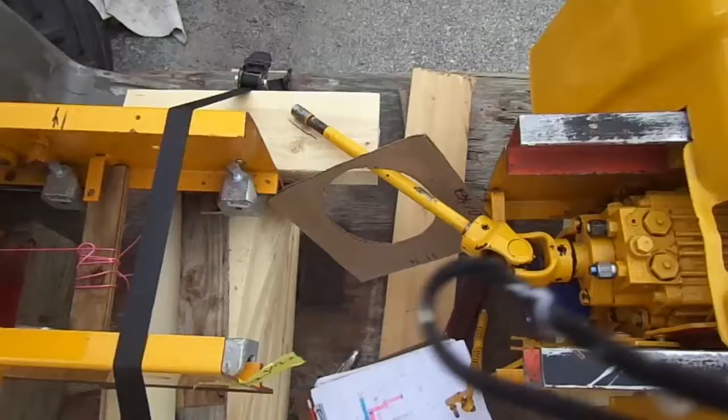Well, this is about how far it's going to turn. It's about at a 45 degrees. And I think it's plenty.

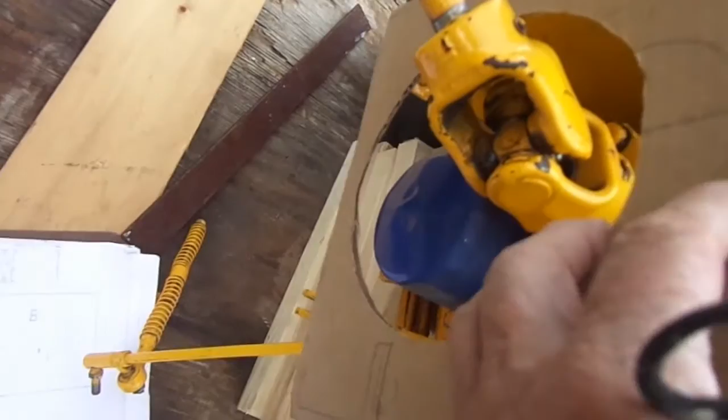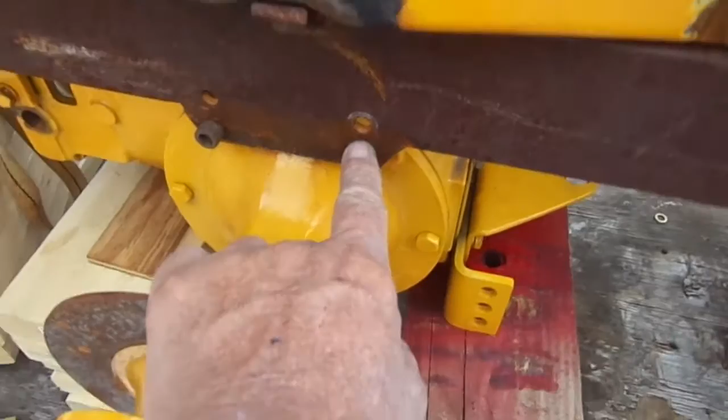What I'm going to do, I'm going to weld a piece of 3/8-inch plate just like this piece here, but it'll be in the bottom like this right here. It'd be in the center of that. But I got the reason why that's not center - that's a 1/2 inch on the bottom, because I dropped this rear end down a 1/2 inch. So now I got to drop this rear end down here, down a 1/2 inch here, and a 1/2 inch here. And that'll put that back right.

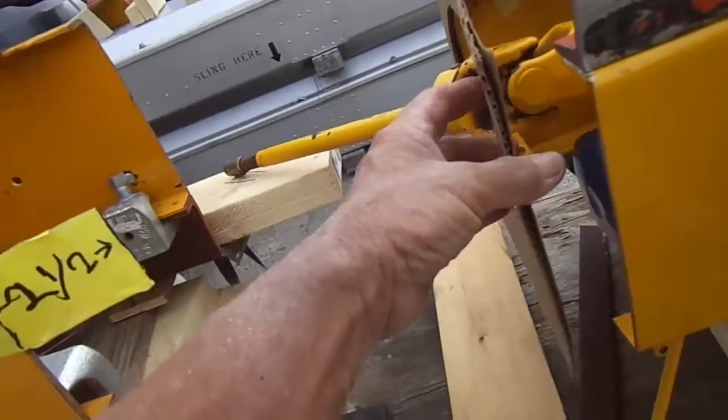But the only reason why I'm putting this 3/8 plate, for one reason, for weight. It'll add some weight to the tractor. Weight is what I want. I want some weight. So, and plus that'll strengthen this hole up right here.

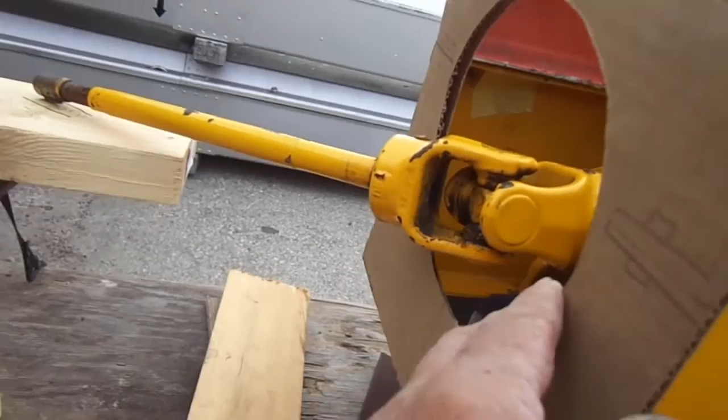And you notice that this hole I got in the middle, it's perfect for the turn of my universal joint. There'll be no problem whatsoever for the turn. Once it drops down, it'll be better where it's supposed to be, about right there.

You see it's about a 1/2 inch off at the top. And that's on this end here on the back where my B is. It'd be inside the frame there.

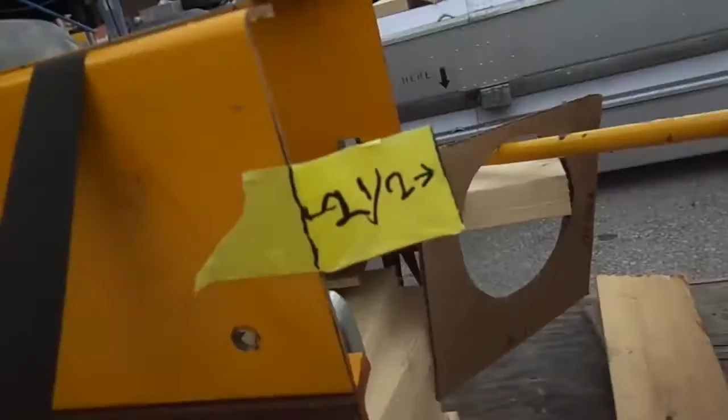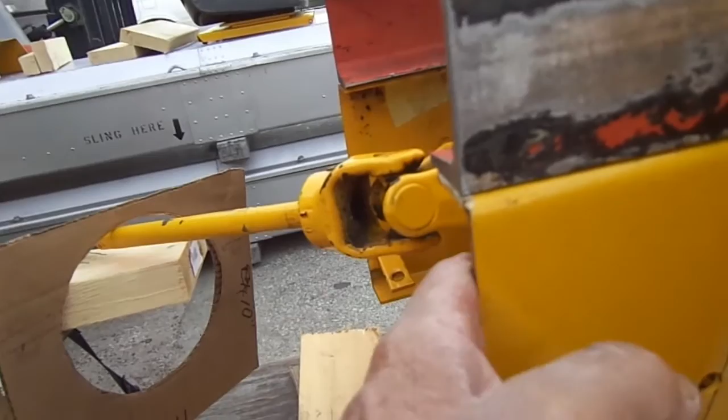I didn't see, I drew that in blue. I should have drawn this one here pink. I'm gonna put a 1/2 inch plate in this one the same way, but it'd be inside the 1/2 inch. This plate here be on the outside of this one, this 3/8. It could be on the inside. I don't know which one. Probably more or less on the inside.

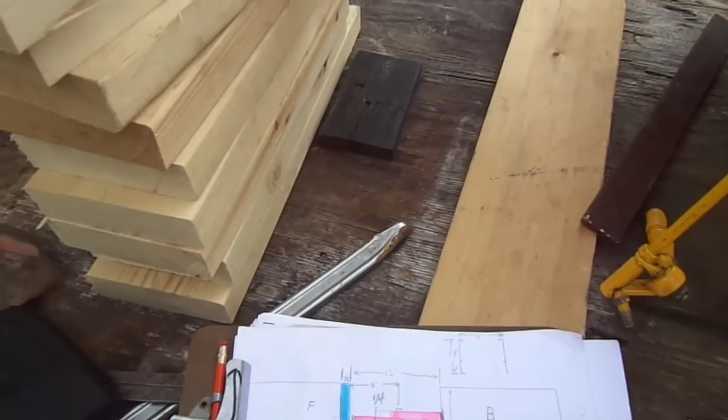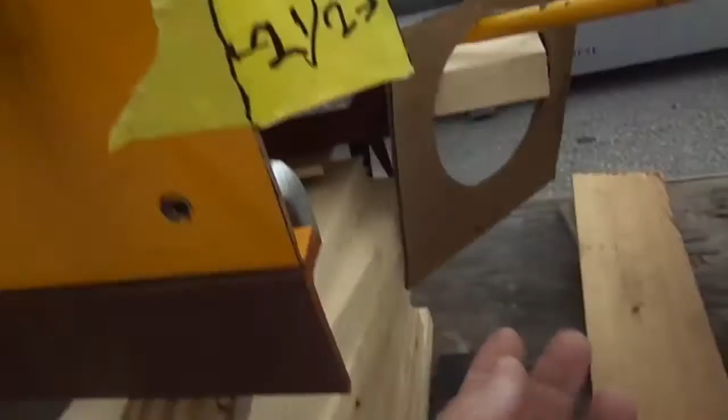It's trying to rain here, but you see from that blue mark right there, and to the end of that yellow, well, that's 2.5 inches. So that's where the end of my bearing be sticking out at 2.5 inches right there.

And inside here would be that 1/2 inch plate weld in here. That's for back of my flange, my bearing flange, whatever you want to call it. I don't know what the real name is, but it's a flange on back of my, and it kind of looks like, well, like that.

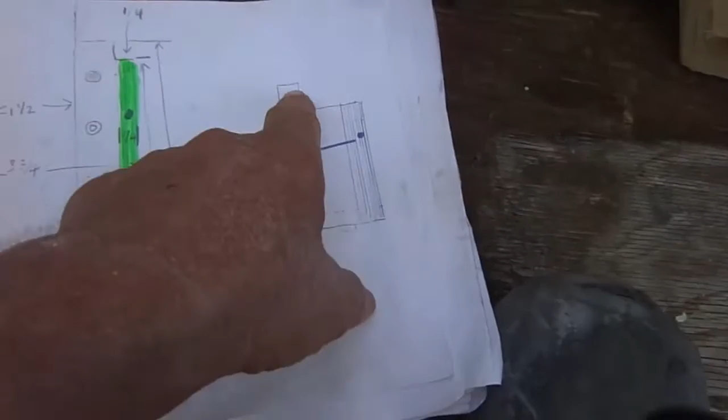You see this going out here with threads on it, this is turned down. That's what it's going to look like. Let's see what you see. Yeah, this is exactly the same drawing here. You see the yellow? That's the yellow there. It's the same drawing.

And that's the same one here. It's just a little littler. If you want to look at the measurements, freeze your computer and get the measurements, there you go.

But anyway, it's trying to rain. I'm going out and look out here by this trailer right here. So I think I got some 3/8 plates. I think I got a piece of 1/2 inch to fit in here.

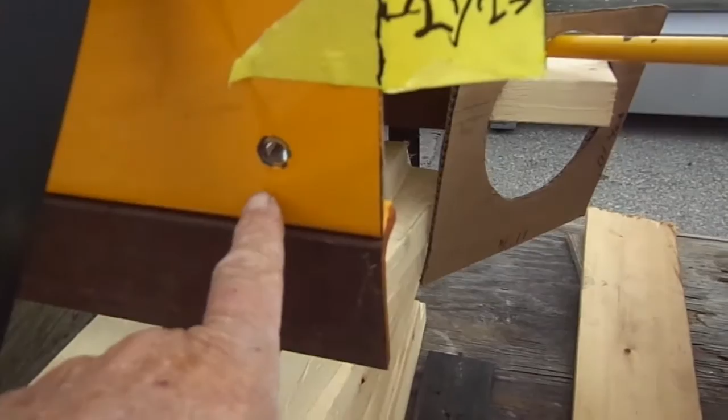But this 1/2 inch, it won't go all the way to the bottom. I don't think it's thick enough. I got to find out how big it is. I think it's 1/2 inch. It might be thicker than 1/2 inch. If it ain't, I'm going to have to find a piece of 1/2 inch.

This piece of plate here is either, I don't know what it is, either 3/8 or 1/2. But it's going to work for that other piece. Let's see what it is. Looks like it's 1/2 inch. That'll be fine, I'll use 1/2 inch.

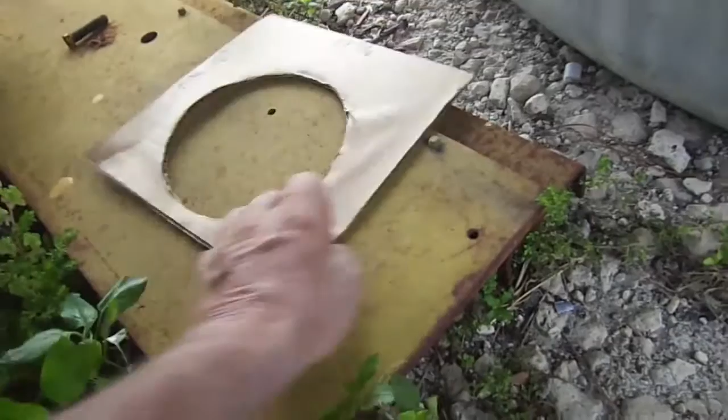Put this on there. Let's see, would it work? Would it work that way? Would it work this way? Yeah, there we go right there. That'll work right out. Cut a piece of that out. This 1/2 inch plate for this here. That'd be beautiful. And the other plate I got, this other plate here, I got a piece of plate here.

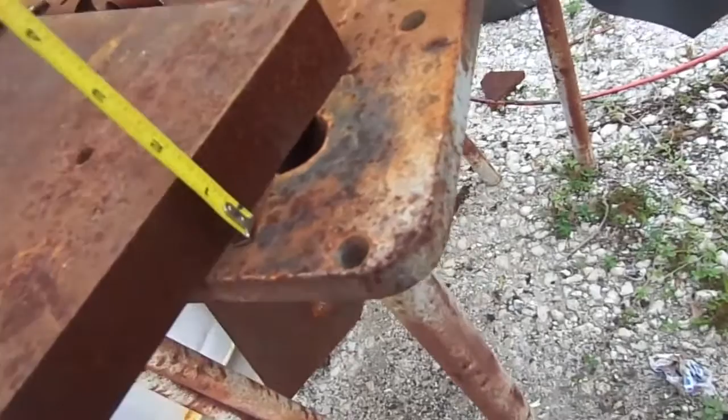It's 1.5 inches thick. But it's not going to work because it ain't wide enough. So I'm going to have to get something else sized for this.

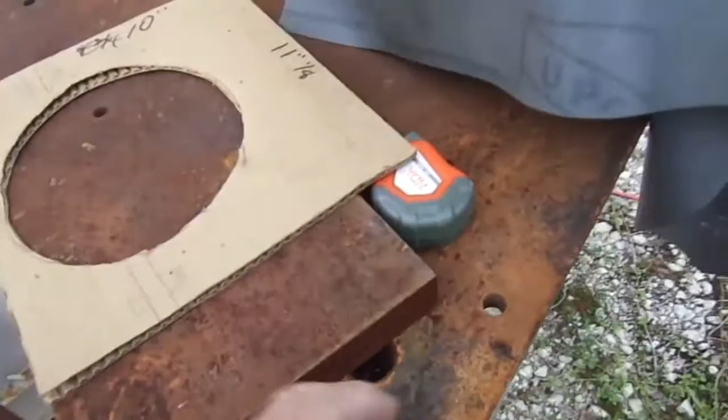I'm not going to use my table. I got a piece of metal there that's 1/2 inch, but I don't want to use it because this is doggone armor piercing metal here. This stuff, boy, it's hard to drill. You could drill through it with a cobalt bit, but it is hard to drill. It'll eat up some drill bits. I've already used some of them. It's just hard to drill through. Very, very hard to tap.

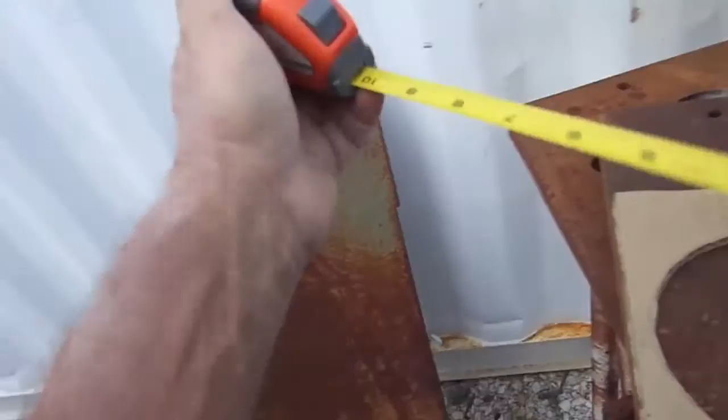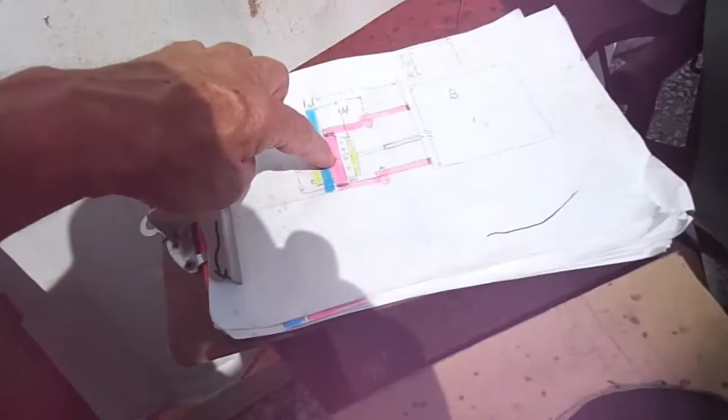Very hard. See, I believe that'll work because if I line it up right there to there, that's going up past my bearing, so that's good. The same way here, this piece here will be this pink piece in the middle right here. So on the top is where my other, down here the scale is a little different. Something different, I don't know what it is.

But anyway, I believe this is big enough here, this piece here to make that. Pretty sure it is. I'm cutting that at 10 and 9/16. That'd be just right. Well, it just fell off. This is like 1.5 inches thick. What is this? Yes, 1.5 inches.

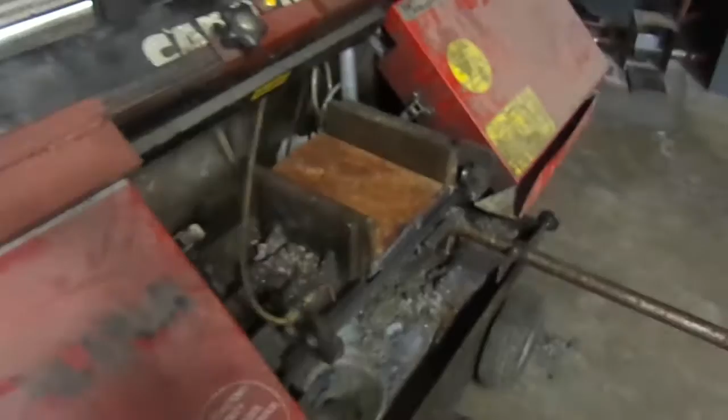I don't need this piece here. I need this piece up here is what I need. Now I need a piece of 1/2 inch, 10 by something. Well, I don't need it. I just go out there and cut it. I got it, I just got to cut it. Get it off the thing out there.

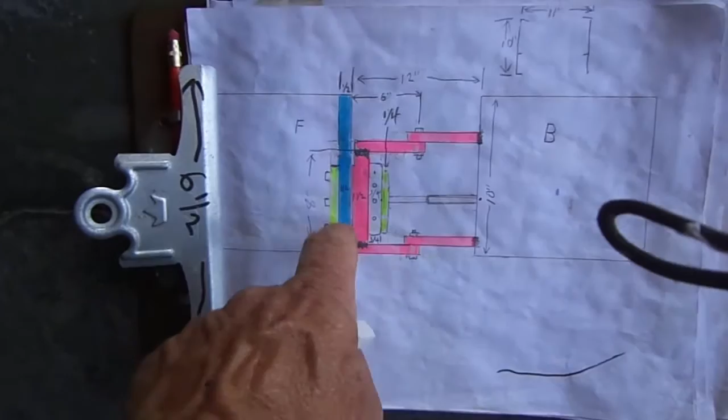This piece here would be my 10.5, which would be this piece going inside of here. It'd be buried in this. I think this is gonna be buried too. Yeah, this will be buried. And this will be buried in the frame.

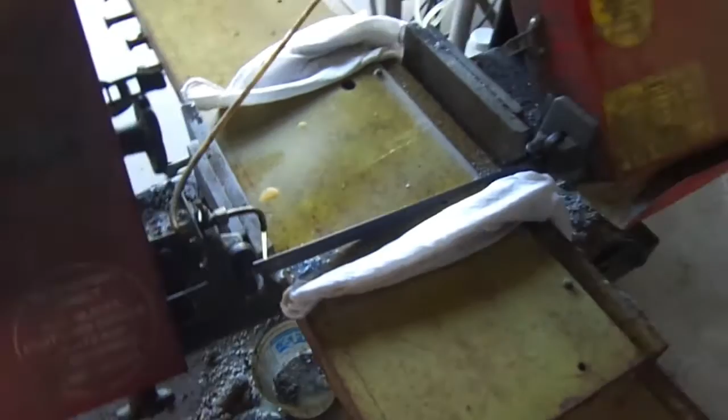So it'll be 10.5 wide, what I needed. So we're gonna cut this off. I'm gonna torch this, then straighten it up with a bandsaw, 10.5 inches wide. Well, here's my 10.25, I'm cutting now. This is for the back end of the frame. Will have the big 6.5 inch hole in it right here.

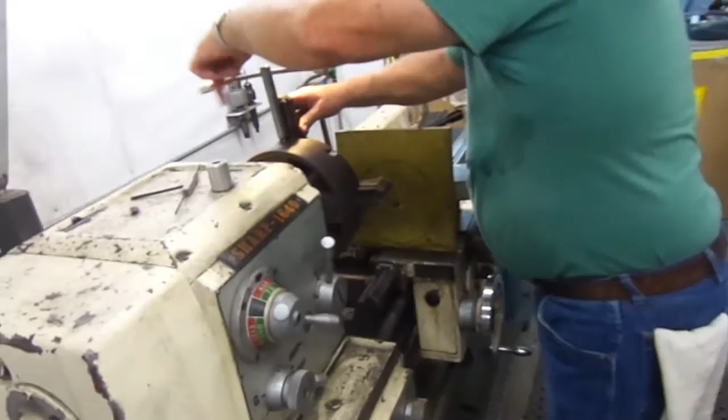You can see my drawing on the back. He ain't going by that, he's going by his own drawing. So he said to hell with that, he's gonna go the professional way. He don't go by magic marker marks, he's going the tool maker's way. Excuse me.

You got top written over here. I know this is a mistake, that's the reason why. Okay, so am I going right? Yes, that direction you are, this is the wrong. That's why I say, I did correct that. But you are right. Anyway, he's going to cut all these out for me and get my bearing up where I can get this thing running.

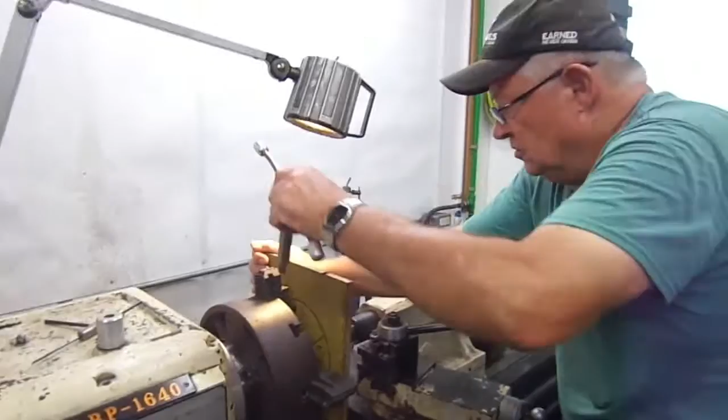These, grinding these off, all these plates. He's got to cut a 6.25 hole in the middle right here for this to fit in. I know that's 6 inches, but that's going to fit in there with a 1/8 bushing in there. It fit in there. That hole over there he's doing has got, I think it's going to be a 7 inch or 6, this is going to be a 6 inch hole.

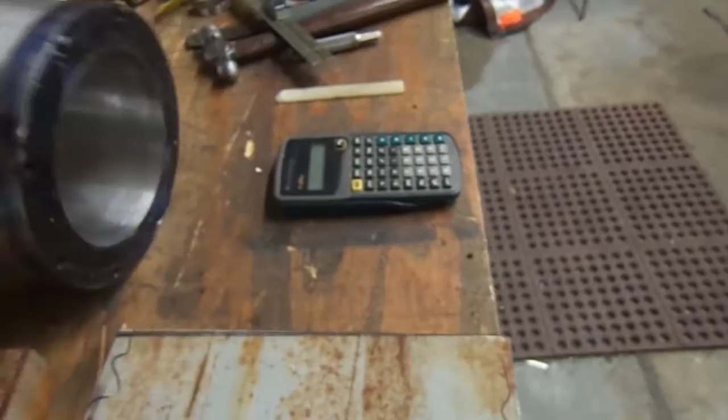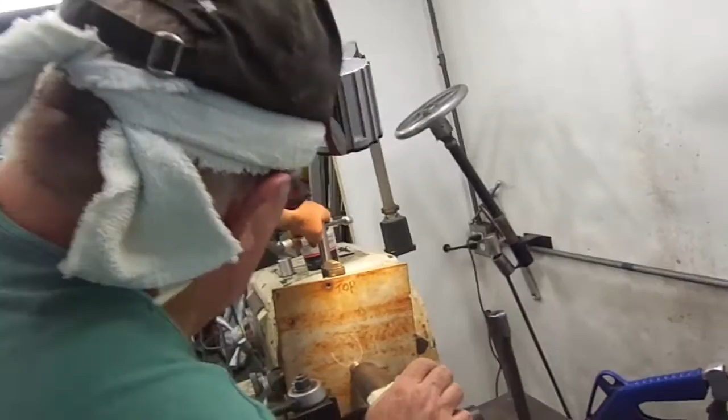This is going to fit through it. When it goes through it, them holes will bolt right into it. The flange will bolt right into this. So we got that, I got just to cut out another one somewhere else, right down there to cut it out. Send it up in the lathe where you can cut that hole with this 4-jaw nightmare, 4-jaw chuck. That's what I call them, a nightmare chuck.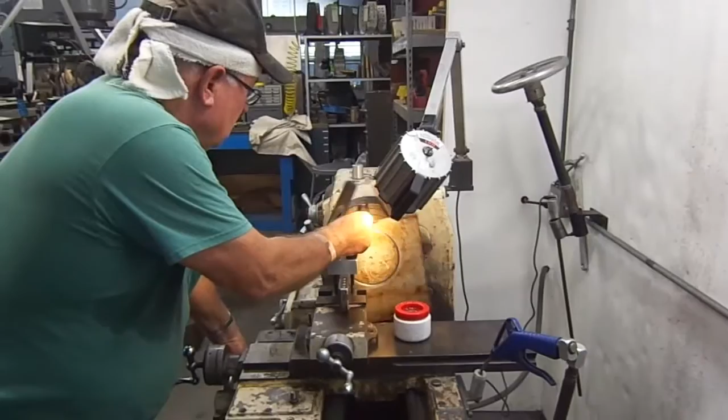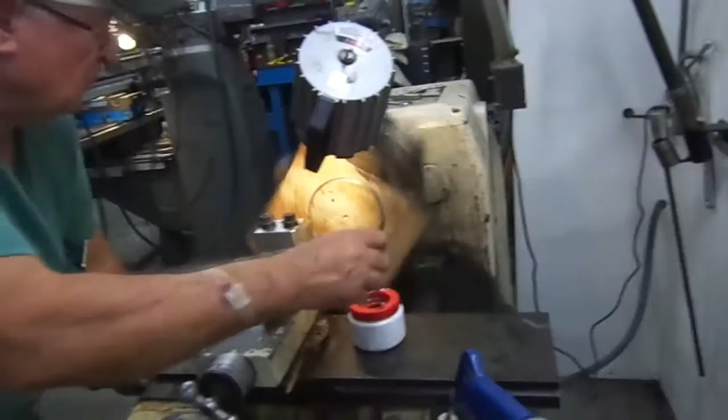It's called trepanning.

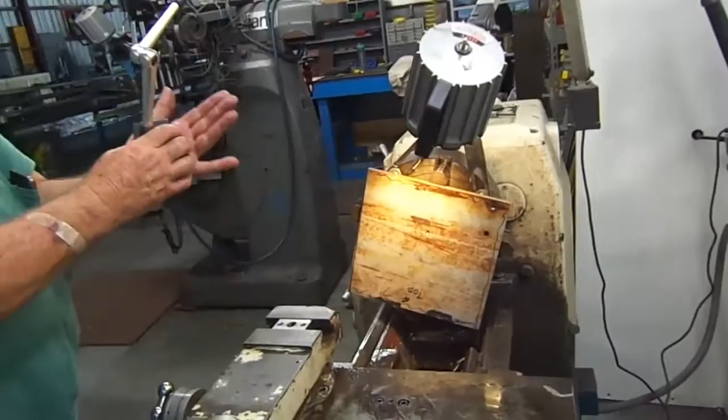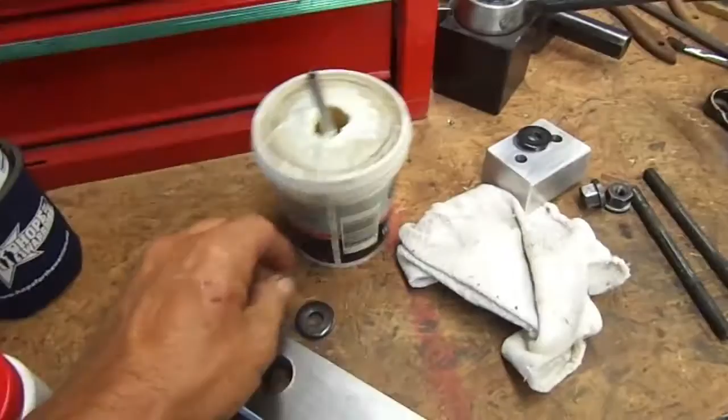Well, he's getting ready to do his second one now. He's got it all lined up and ready to put his homemade tool post in there. He made this, he made this to go on top of it to hold it. Pretty fancy little deal there. So he can slide that thing up, because if you go too far, this part here runs into the item. So he had to make that piece where it would go out further and get that out of there.

And this is the one he already did over here. Where'd it go? What'd I do with it? Oh, I took it over here. It's a little dark here right now, but that's it right there. It's ready to go.

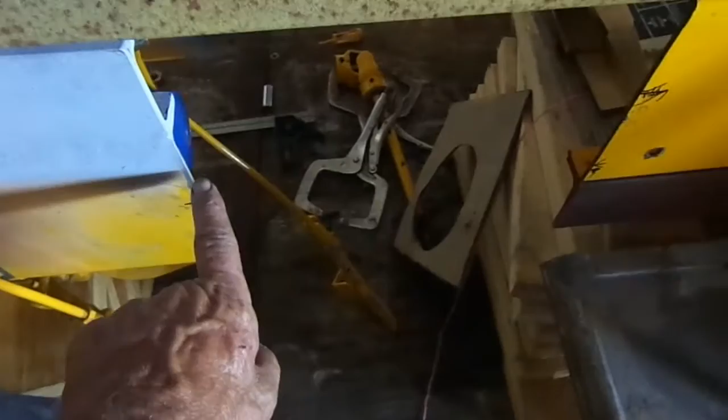So we have, this is a 6 inch piece, to be welded here. I have another one with a 7-inch hole to be welded here. Then I have the rest of my bearing on this side, and my other pieces going here.

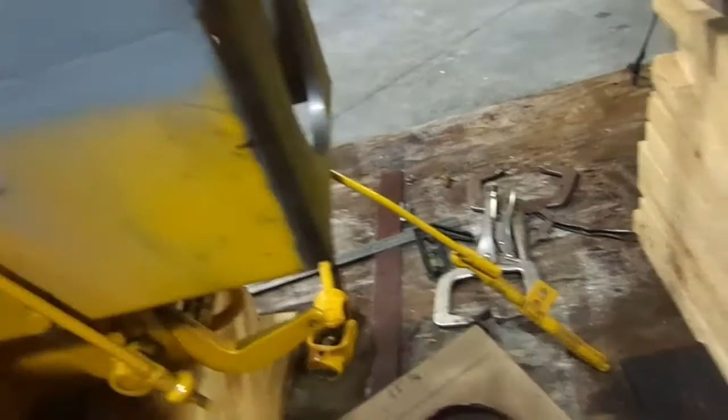So this is a 5/16 plate. This is, let me think, 1/2 inch plate here. So what I got to do is cut this back 1/2 inch, cut that out 1/2 inch back, and do the same thing behind there and behind there. Because this won't go up in there, it's got to fit inside the frame. So it'll be welded on the outside and ground smooth, then I weld it on the inside.

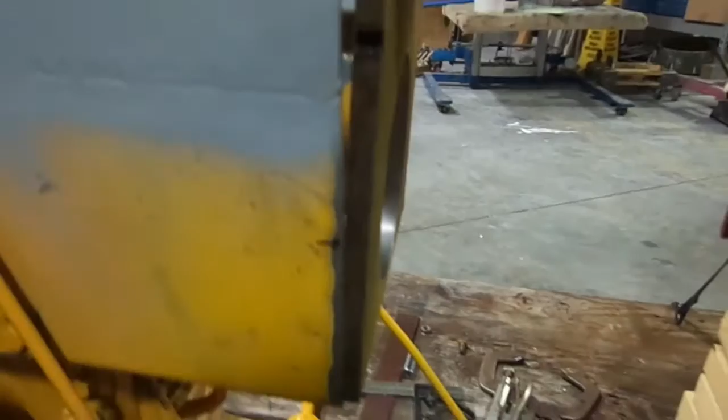And won't have no bolts here at all. Won't be no bolts, won't be no bolts. These holes will be covered up. That'll be taken out, covered up. I'll knock these bushings out, cover them holes up. Because I can't use these, they're too close for a hydrostat pedal up here. So I might have to move it back a little bit somewhere to make a hydrostat pedal. Can't make it right there, it's just too doggone close.

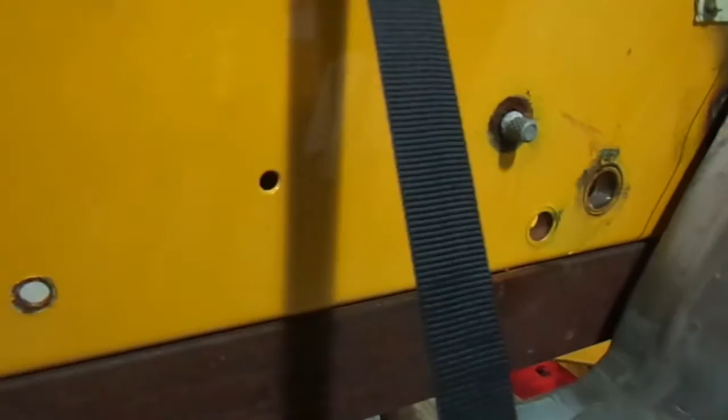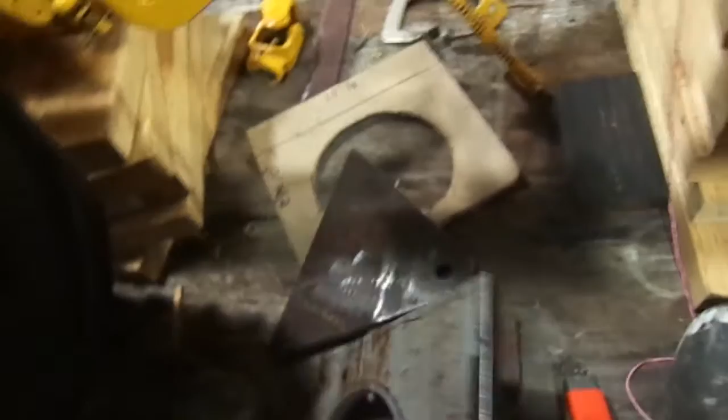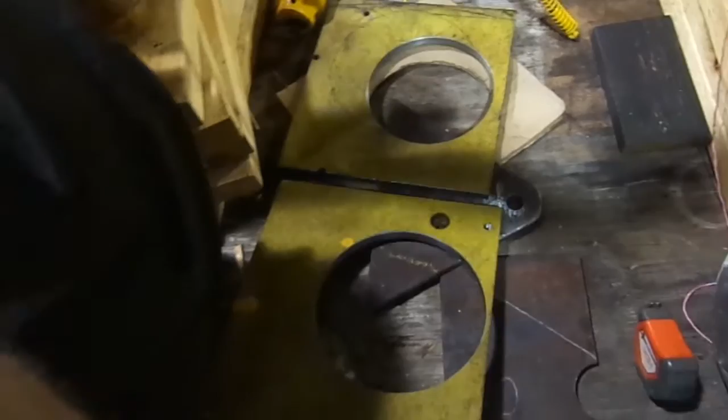But this one, this is the 6 inch. I don't know why I put it here. This 7-inch hole right here goes in that one, you can see it's much bigger. I don't know, yeah, you can tell it. That's 6 inch, this is 7 inch. So I got to swap them over, put this one on this side, then use this one over here.

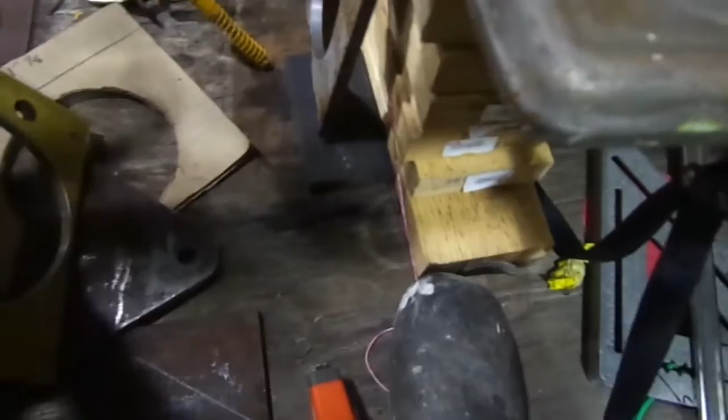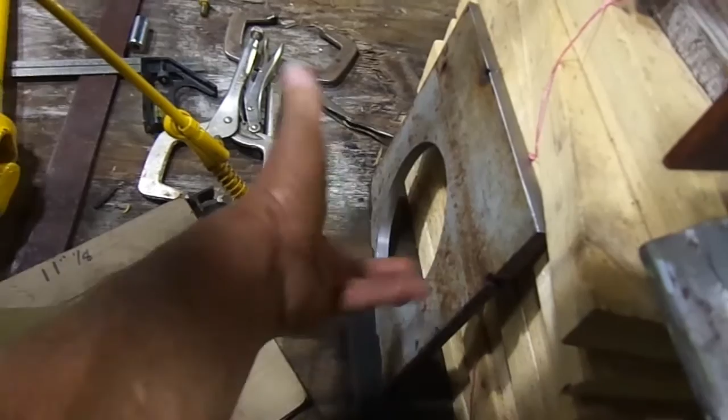This one will be my flange bearing come through here with that 1 3/4, I think it's 1 3/4 piece, be on here, then a nut be on it. Then I have 2 of these plates welded here, one down there welded off of it. Something like that.

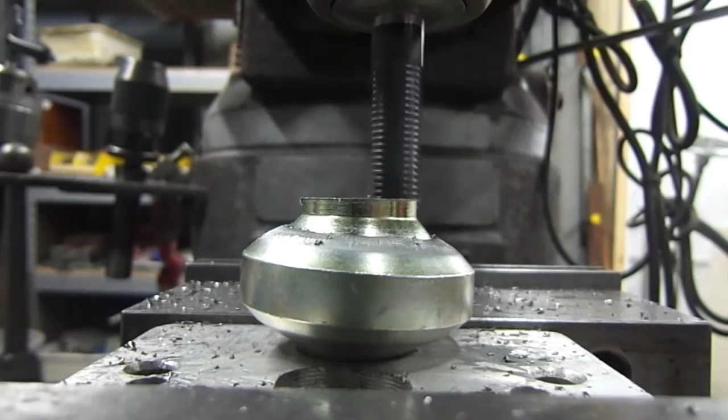Tend to do that till we get to that line, top of my finger, my nail. We get it down to that. That's what I want, I don't need all that height. I need a little more clear.

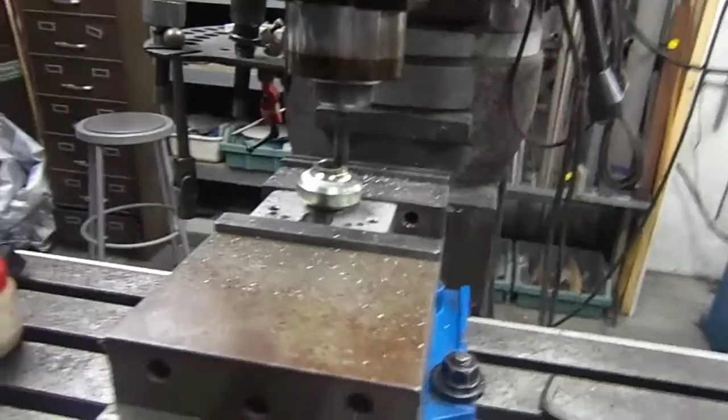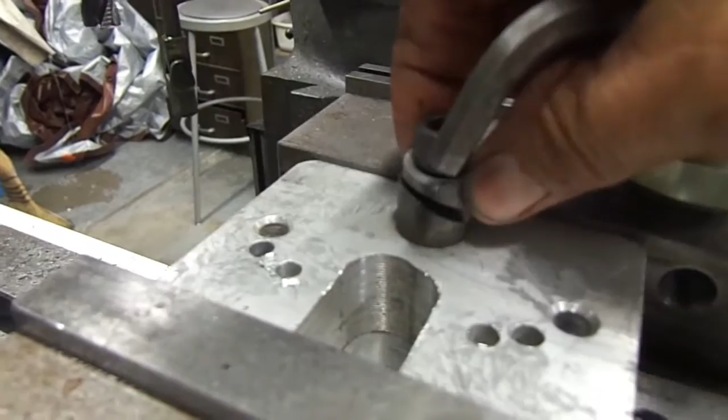I know you were wondering how I was holding it. I have a bolt in the middle. I made a little wedge clamp, just like they did in the bicycle handlebar. When you put the handlebars on, you tighten that top Allen screw up, and it stops your steering wheel from moving. Well, it's the same way I did this. Just unloose it, pull it off. You see them 2 pieces wedged together? So when it tightens up, they both expand, and they hold this thing for me.

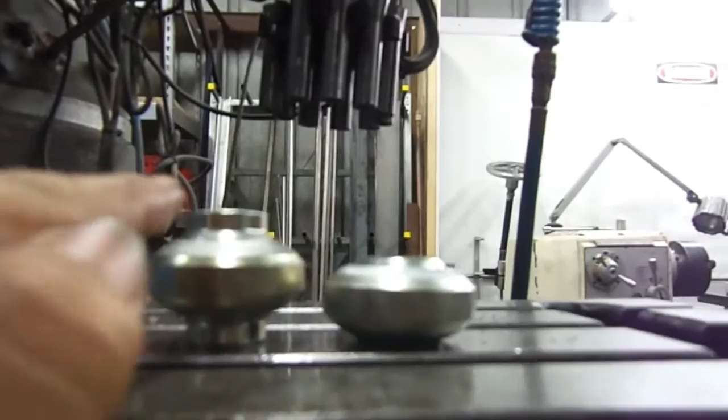So that's how we're doing that. I got one more to go with that one. All right, see how much different, tall this is? Lower than it is? That's what I want. Want it a little lower.

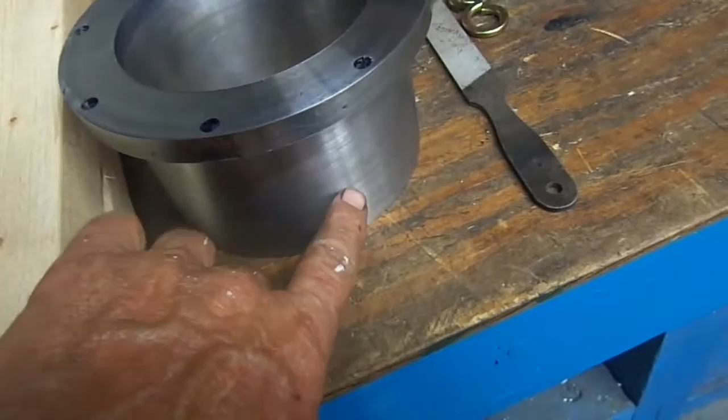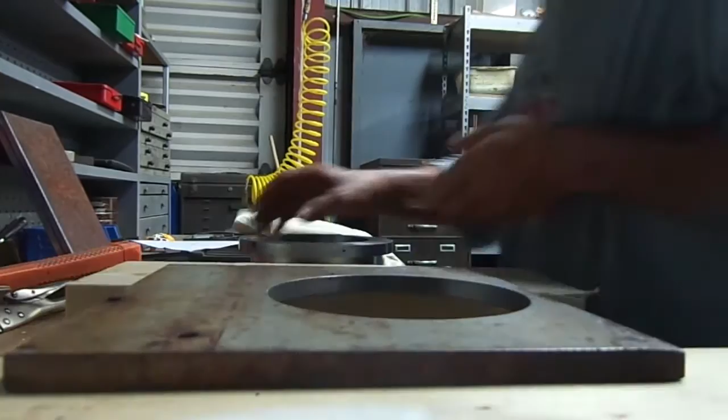There we go. Now I got to get this thing lined up pretty well and drill all these holes through here and tap these holes through here so I can put Allen heads. I'm going to put the Allen heads down in here a little bit so they won't be above it, they'll be down in it. So that's my plan.

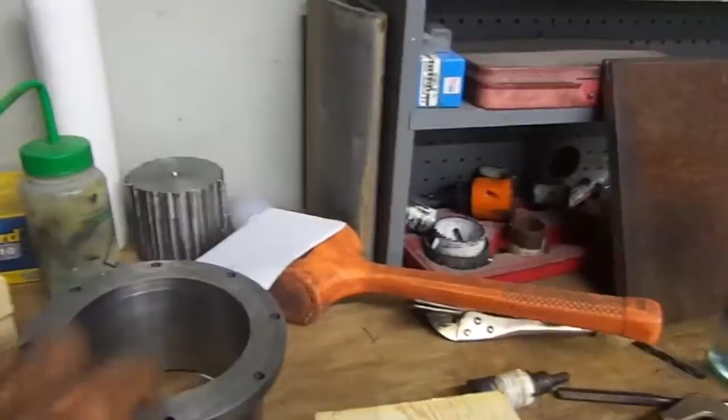Alrighty then. I took and laid that piece of this thing down in this hole, and I center punched every one of the spots where I got to tap, so I'm drilling and tapping all the holes now.

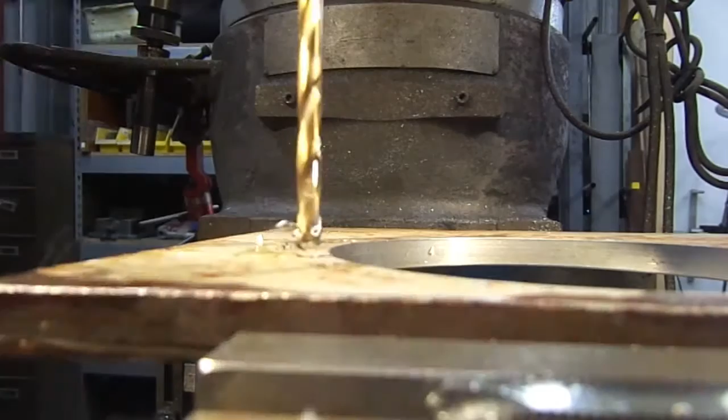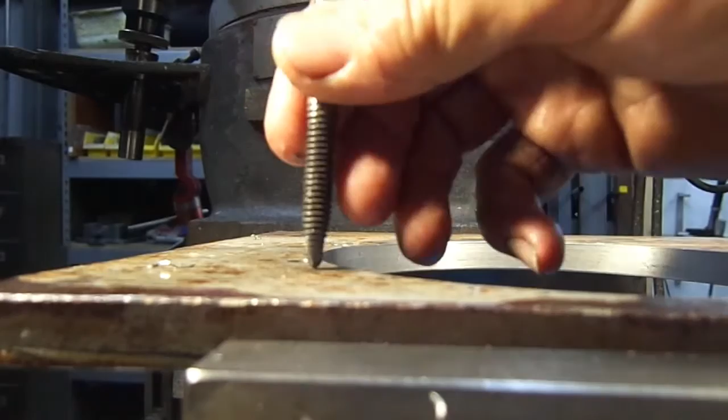You just got to make sure when you're coming down with this that right here you got enough distance in there. Don't let it bottom out, it'll break your tap off, because it can't keep going if it bottoms out. So make sure you have plenty of travel play. So just grease that booger up, start your engine, pick it up some.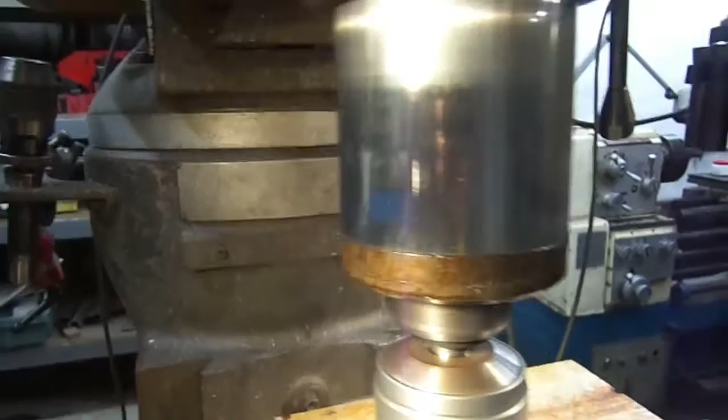Whoop, got to put it in low, can't get it high. Put this thing in low. Make sure it's in low, yep. Now you got to turn this the opposite way, this handle up here. Nope, wrong way, the opposite way. I was doing the opposite of the opposite. Just let it go. Watch it. Watch for your tap to come through here.

Drill back up. I got a little confused then with the camera. Almost didn't find my lever in time. Almost screwed up. So that's it, that's tapped through.

I'm about to put the camera down and do this because I don't want to. I almost bottomed out there, and I almost bottomed out there. I couldn't figure the lever, which lever, I got confused there. So I'm going to put the camera down and finish these. I ain't got but 2 done, so I got the rest of them to do. Well, this is the last hole. Got them all tapped but one.

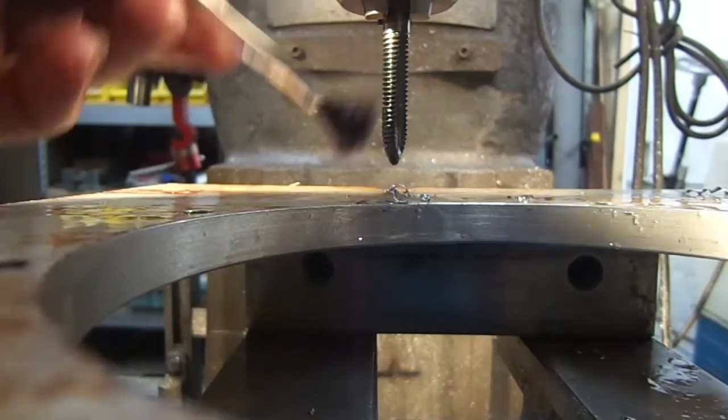There she goes, the last one. Last cotton picking one, we're through with that. I'm glad, I am glad, and we're done. We'll take it over and set the bolts, line up my piece over there.

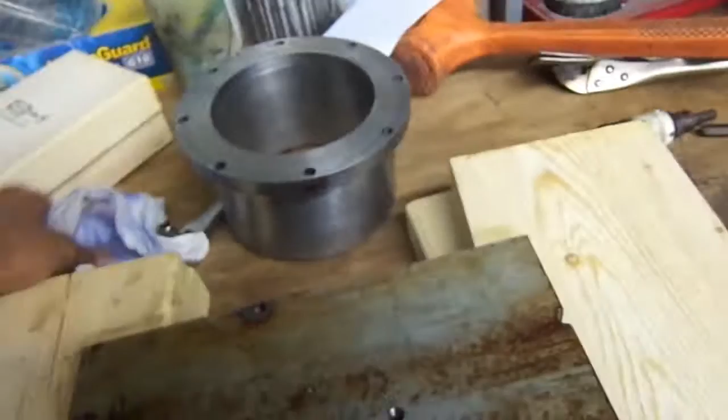Well, this is where the rubber meets the road, you might say. See if it's even gonna fit. I did mark top, didn't I? Yeah. Let me see if I got the right side. Yeah, I got the right side. So we gotta line that up with the mark at top. That's it there. Get a few bolts over here and see if they're gonna start.

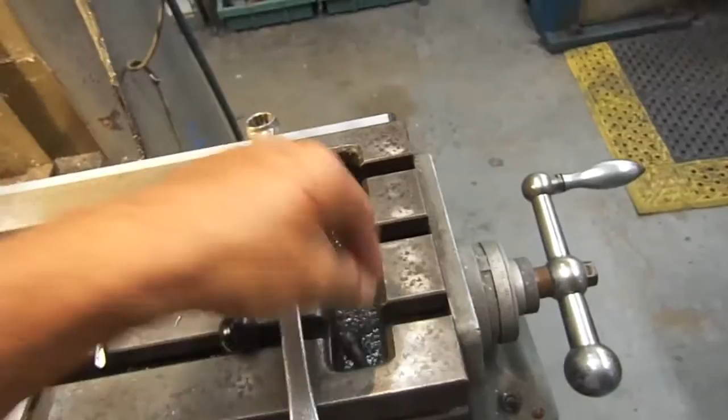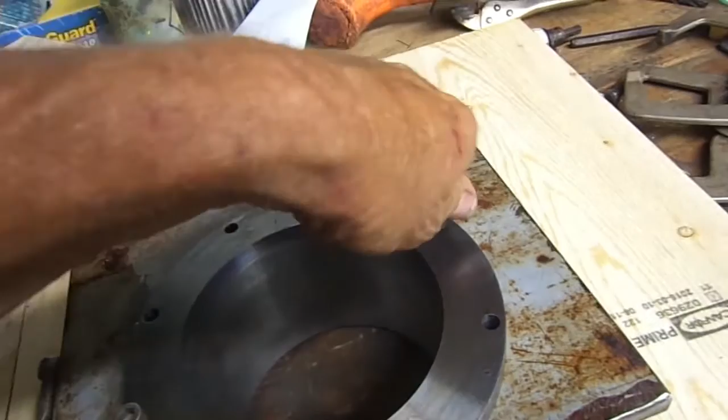That'll be the next thing, if they start. If they do, that's good. If they don't, it's gonna be a pain in the ass. That one started. That one started. All right, that one started. All right, good, so that's 3 that started, that's pretty good.

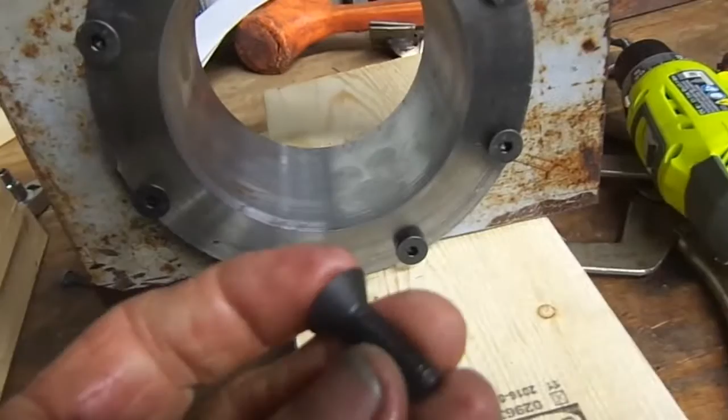Well, I decided to use these 5/16 countersink heads, but I hadn't countersunk yet. See them sticking out? They stick a little over past that, so I'm gonna stick them in the lathe and turn the head down just a little bit so they'll stay in the perimeter.